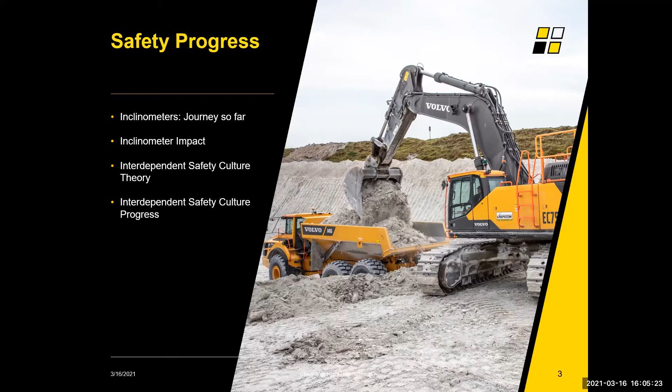So as I mentioned, the safety section will cover how safety has progressed in the industry with a strong focus on inclinometers and ADT stability, and just a little bit of theory to discuss how we can measure safety culture and how we as an industry can try and improve and move forwards. So I'm sure everyone attending today is more than aware of inclinometers and their critical role in ADT stability. But for those who may not be as aware, I just wanted to run through some key dates in getting to where we are now.

So our journey started a little over a decade ago with a worrying rising trend for Chepstow Plant and the industry for ADT turnovers. By 2014, turnovers were increasing circa 30% year on year, really telling us that something had to be done about it. And the first step for this was prevention, i.e. combat the rising overturn trends, which included retrofitting inclinometers, and then including inclinometers as a pre-tender requisite. So the joint collaboration between Sibelco, Chepstow Plant and other major nationals in these purpose-created open forums really made this possible.

From 2016 onwards, we at Chepstow Plant then took this one step further by shifting from a preventative mindset to standardization. So what does that mean? Well, simply every new ADT which was ordered by us from this point onwards would have inclinometers fitted in the factory as standard. We then started to have control measures in place and predefined manufacturer parameters to enhance ADT safety.

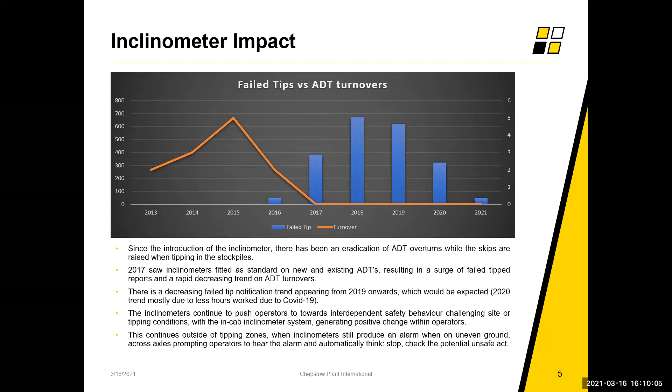To go alongside that, and so we're not putting too much onus on operators or technology, the in-cab audible alarms are still prompting our employees to stop and consider the unsafe act when a failed tip arises. So we're still generating positive change to carry on the progress both we and the industry have made in the last 10 years.

And to go on from that, just looking at a bit of safety culture theory, I'm sure most of us on the call today are already aware of the Bradley curve and the progression in safety cultures from a reactive one to an interdependent one. I don't necessarily want today's presentation to be too heavy in theory, particularly at 4:10 on a Tuesday, but I thought it was a good opportunity to share some thoughts on it. It ties in quite nicely with that ADT inclinometer campaign.

So for those not familiar with the curve and the different safety cultures, in short, the main difference between your reactive and dependent versus an independent and an interdependent culture is the employees' engagement and commitment to safety without that constant management supervision. And these culture differences are perhaps best reflected by comparing what the concept of zero incidents means for each culture.

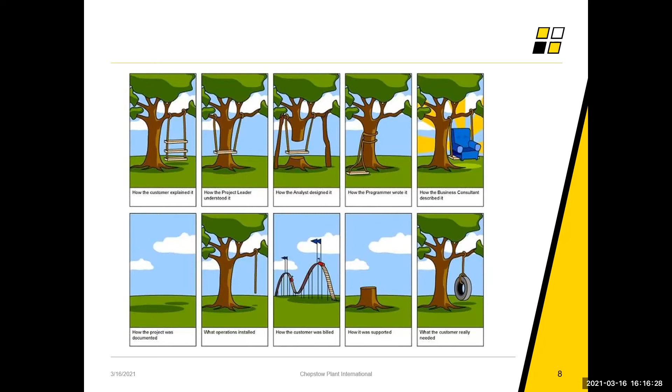So hopefully that gives us a bit of an insight from a Chepstow Plant point of view in how we approach safety, our safety culture, and what we try and do here on a continual basis to challenge and develop it. So moving on to the technology side of the presentation, mostly focusing on data analysis, introduction of new technologies into the industry, such as Haul Assist, and then looking to a few other ideas as to where the industry may go in the future.

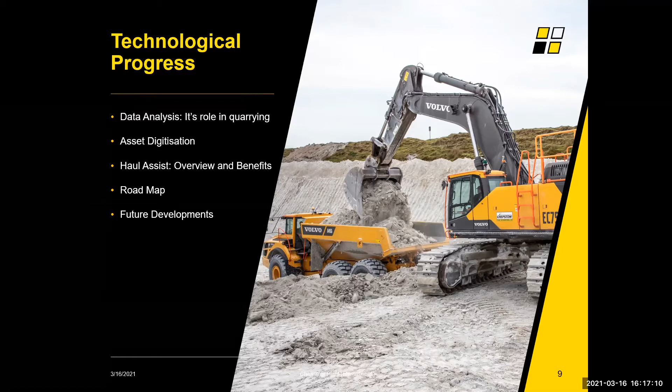But in our opinion and experience, we all have different on-site challenges or views on which KPIs are the most important to us. For some, it might be tracking fuel burn or litres per tonne carried. Others might be more focused on production tons per hour. And no two quarries are really the same. So we've got to start asking the question, why should all our reports or targets or analyses be the same across everything?

And certainly over lockdown, where we've had more of these Zoom or Teams meetings, perhaps spending more time with our PCs rather than out and about, we found one of our key challenges here is avoiding getting to the point of data saturation. I'm sure we've all thought that at some point. But if we haven't, what is data saturation? It's when we receive information from across the business and there's too much of it. It's unstructured, not necessarily analysed, it's just raw, conflicting or visually unclear.

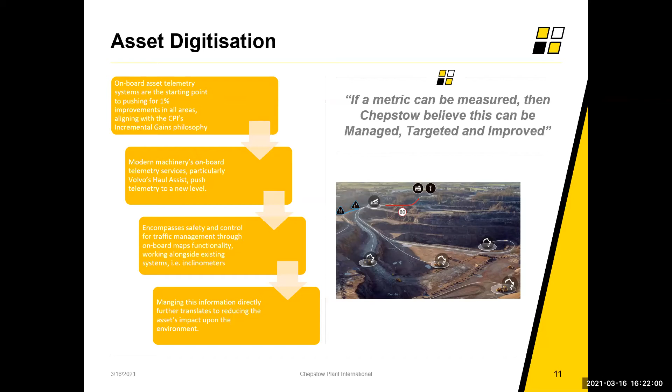So really the next couple of slides help focus on how we've used Volvo's newish system, which produces the data which we try and translate and use back here with Haul Assist. And the important thing for us is that the systems which we're looking to put in place work alongside current reporting mechanisms, so we can get the most out of our data. So it's not just going into the ether, it's not just falling on deaf ears. So for those who aren't overly familiar with Haul Assist, I've got just a short video here from Volvo to provide a brief overview.

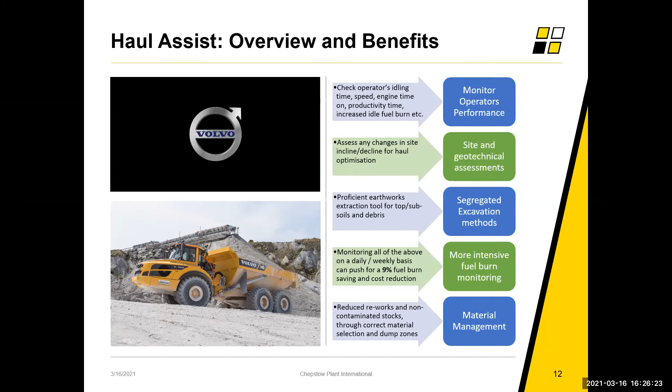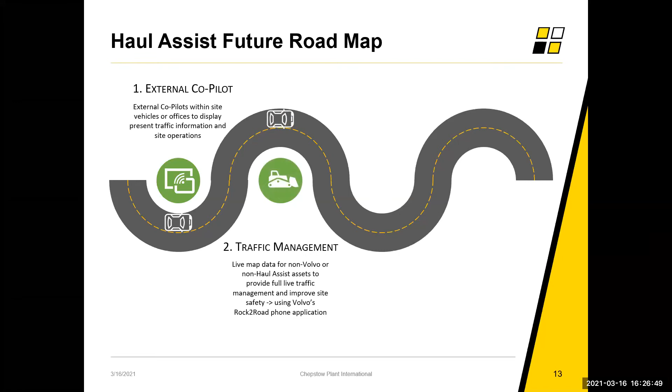And whilst the system in its current format is great, we're always looking at how we can develop it, change it, and deliver more back to our customers, to our site, to everything. And so this slide touches on the development of the system and what we're hoping to evolve further with SMT. We're fortunate enough to have worked with Volvo since day one on this, from initial concept through to beta testing and it going live at the back end of 2019. We've invested heavily in it from a knowledge, capital and infrastructure point of view. We are now running the largest Haul Assist fleet within Europe, so there's some exciting stuff for us to look at. At the moment, we're looking at trials for live data analytics from a production point of view on site.

So you get to take that one step further, and you can look at sort of the aggregation of production. We know where you are at any given point in the day. You can set targets. You can try and work out a lot closer to where you are or where you've got to be. And really, it helps underpin some of these data challenges we've been discussing, where you don't necessarily need to pore through reams and reams of spreadsheets or endless meetings to try and understand where you are. Instead, you can try and get a glimpse as to what's going on, and then if necessary, redirect or redeploy or whatever you need to do to try and make the improvements.

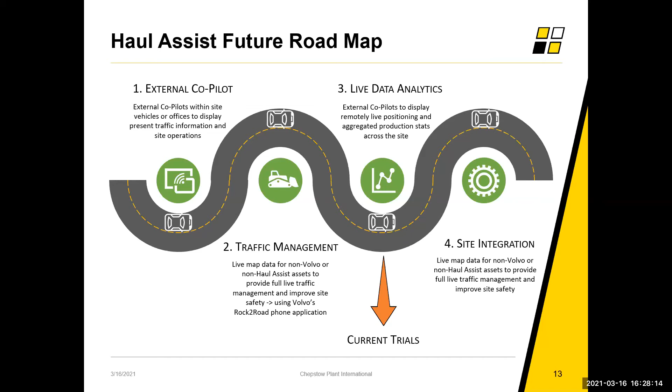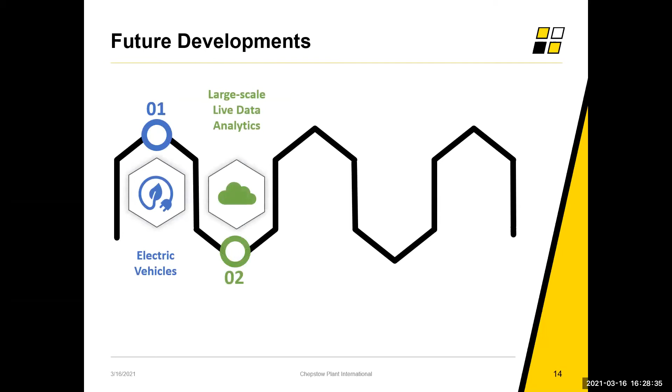And so with where we've got Haul Assist here, it always gets us thinking back here, where are we going in the future? And really the final technology slide is one for some debates, either a little bit later or offline or just for yourselves. But it kind of underlines where we at Chepstow Plant feel the industry is heading, where we think things are going to change.

And the important area for us at the moment is any technology or initiatives that really focus on decarbonisation, such as electric vehicles, or any form of development where we're able to remove risk from the live environment. So that might include something like the remote piloting or the use of virtual or augmented reality in a maintenance function, or of course the autonomous vehicles.

Some of these are already in play, and albeit they seem possibly far away, in quarrying's bigger brother, mining, the autonomous trucks are already in play, and have been for the last decade or so, as has the remote piloting. And all these newer technologies always cause a bit of a debate over here, particularly between generations, where we've got people right from their 20s up into their 60s.

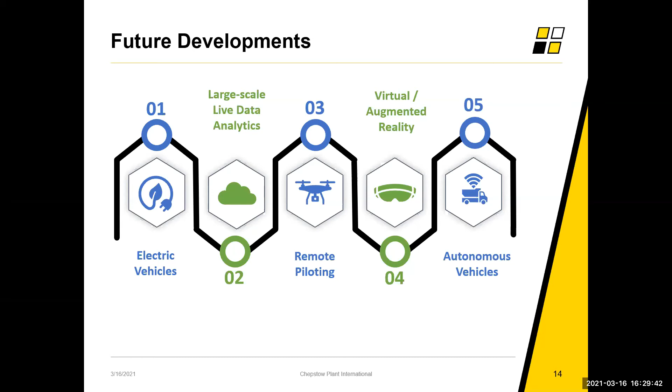But one thing that any of our debates back here always bring home to us is that none of these future developments, however we look at them, whatever they may be, we can't realize them without having competency. And if we don't have the right people for the right application, then we won't achieve it either.

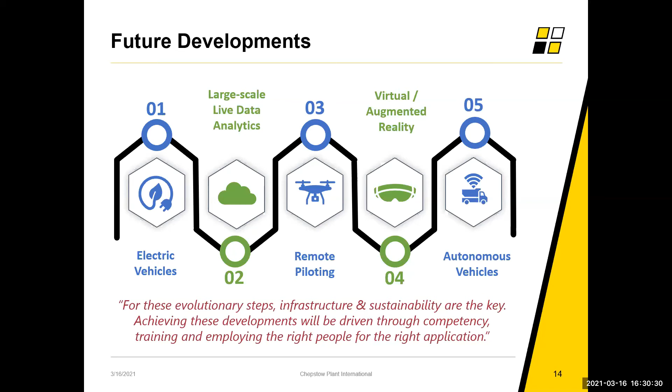And so you look at something like a vision of a fully electric and autonomous ADT fleet. If we don't have the right people in the right application, then it becomes a vision, not an actual tangible target. But just some thoughts from us as to where we think it might be heading. And as I said, they always prove a popular debate topic, or where other people think it may be heading instead.

Just to go into the final section in our learning and development, it touches on how the seemingly small changes can aggregate into much larger impacts that we've been previously referring to, and a little bit there again on decarbonisation and what that can actually mean in reality.

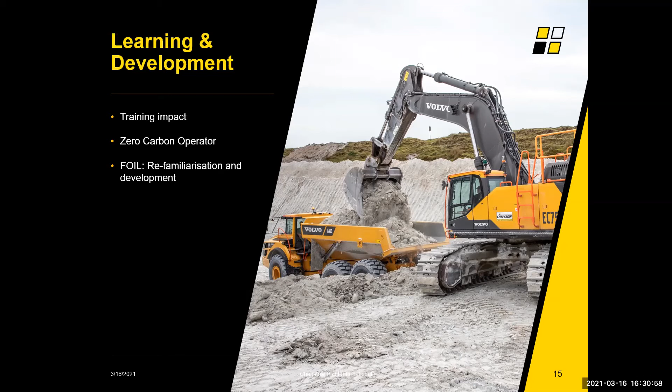So the first one is on training impact, and I'm sure all of us here today recognise the importance and the value in training our staff, whether it's operators, managers, supervisors, whatever it may be. So I don't necessarily want to dwell too much on this one. It's still important nonetheless, just to refresh.

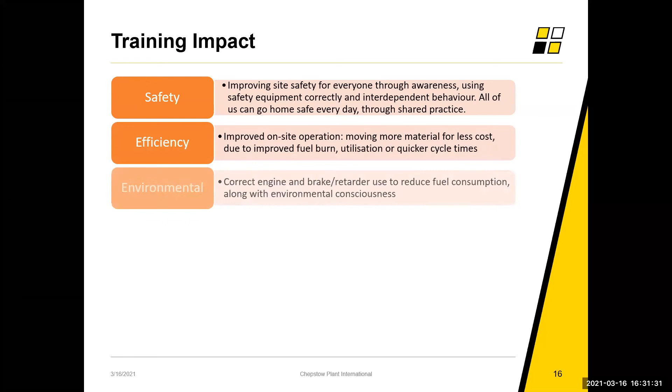But for us at Chepstow, the main driver has, and always will be, training as a tool to drive safety standards on site. There may be other factors such as pushing efficiencies or environmental impact, as these are the sorts of things that can get us that tangible return we all look at when it comes to investment and resource time, etc. But for us, safety is always at the forefront of training.

But there are areas, of course, where we see success, and in particular, it's nice to have this conversation with the Southwest region, as we have some of the highest staff retention rates in the country within the region, a lot of which we attribute to the training and the competency, which to us at least, and hopefully to our valued customers in the area, is crucial to the ongoing success within the region.

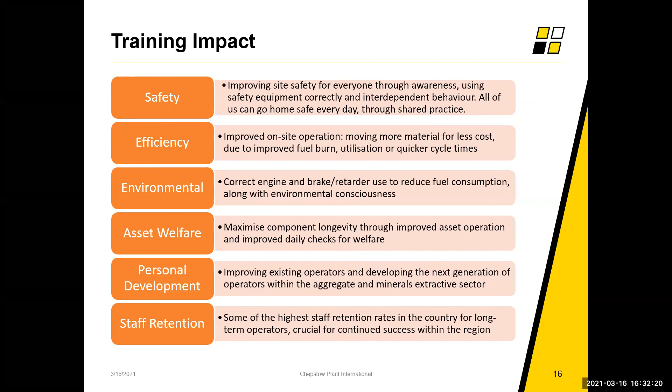And so it sort of brings us into the last couple of slides where it seeks to try and fuse together everything else I've tried to speak on and put together, looking at what we determine as the zero carbon operator. And these KPIs in particular focus on these aggregated marginal gains, the development and use of technology to help evolve our operators.

And so, as I've mentioned, the key driver for us when we look at stuff like this now is decarbonisation, and it's something that's ever more important for everyone, particularly considering the end of the red diesel rebate in the next 12 months, which I'm sure, like us, you're not particularly looking forward to, and the ongoing drive to meet industry and UK-led emission targets. So any gains that can be made in gravitating towards decarbonisation and reducing fuel usage can all direct the bottom line. And so our FOIL initiative strives to do this and create this zero carbon operator. So what is the zero carbon operator?

Well, to us, it's someone who understands the impact our industry has on the environment, someone who understands fuel burn rates, the direct costs we have on fuel, but also understands it one step further. They understand the productivity: if we're underfilling dump trucks, then we've got more loads and we're wasting time, fuel and everything else. Or keeping an eye on asset management, whether that's excessive engine power or not having the correct ratio between brake versus retarder usage, as an example.

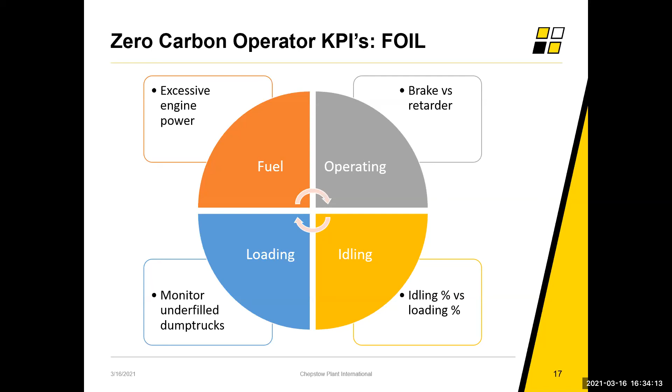And so to come to the final point here, slides like that where we talk about initiatives, I might undercut myself, they always look great in brochures, and it's great to plaster them everywhere, saying we do this initiative, we do that, etc. But we've always got to ask ourselves, in my opinion, two really important questions when going down this route. Does it work in reality, and does it actually produce any results? And for us, the short answer is yes. We have directly applied this initiative to a few customers, but one in particular, which has helped identify a lot of the examples currently on the screen.

So as an example, we established that the EC750 EL on a certain site was using 106% more fuel an hour in high power mode. In exact litre terms, it's 33 litres an hour versus 68 litres an hour, which over an entire year is nearly 70,000 litres of fuel wasted. Look at idling. This is already on a lot of people's radars, but just 30 minutes idling a day per truck, which if we're honest isn't that difficult to do, whether it's break time, the start or end of the day, or you just want a toasty cab in the morning, that's 3,400 litres a year wasted per truck.

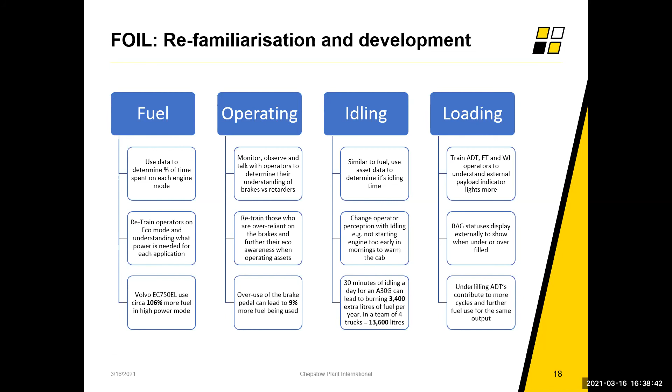I hope you all found it insightful to how we at Chepstow approach the sector, and really the opportunities that we see that lie ahead for us, whether that's in health and safety or development or within our assets and the decarbonisation that we've spoke about. So on that note, I'm obviously more than happy if there are any questions or any other ideas to talk on, more than happy to try and help or talk through them a little bit more.

I've got a couple I could kick off with, Ross. One is, you mentioned on one of the slides the Rock to Road phone app with Volvo. What's that about? So the mobile phone app, we were trying it back in the summer, and there's still some things I think they're working on, but what it allows you to do is have a non-Volvo branded asset, or a fitter on site or a site vehicle, and that will then show up in the ADT Haul Assist. So if you've got A40s running around a site, they will be aware of incoming vehicles into a live risk environment.

Okay, so you've got to have the basics of the Haul Assist set up. It runs off the platform, and it just gives that greater visibility to everyone. But it's still in development. It's still stuff we're working with them on. But yeah, it runs off that base platform.